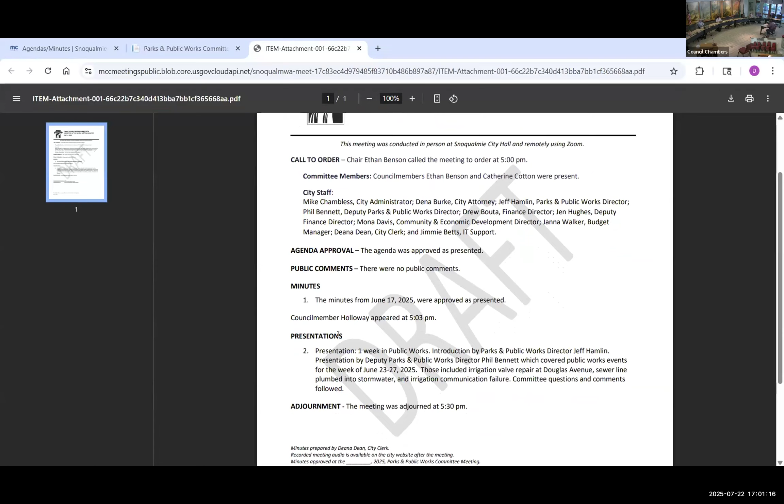First discussion topic is the reclaimed water distribution system improvements, and I believe Andrew Vining is going to tell us about that. I'm just taking a shot in the dark though.

Good afternoon. It's been a little while. It's been construction season, so we've been busy out on construction sites, but I'm here to give an update on what we've been up to.

So I'm going to start with the reclaimed water distribution system improvements, which is currently underway at the site on Ridge Street and Eagle Lake Drive. The flickers have moved out.

Yes, and I'll be providing an update on that as well as other tasks completed. So, flicker update. All right, just a quick recap. This project has come a long way since summer 2023.

That was when we completed a draft engineering report and a siting study. We evaluated 6 different sites along the BPA power road there, as well as adjacent to Eagle Lake. That engineering report is now final and approved by Ecology.

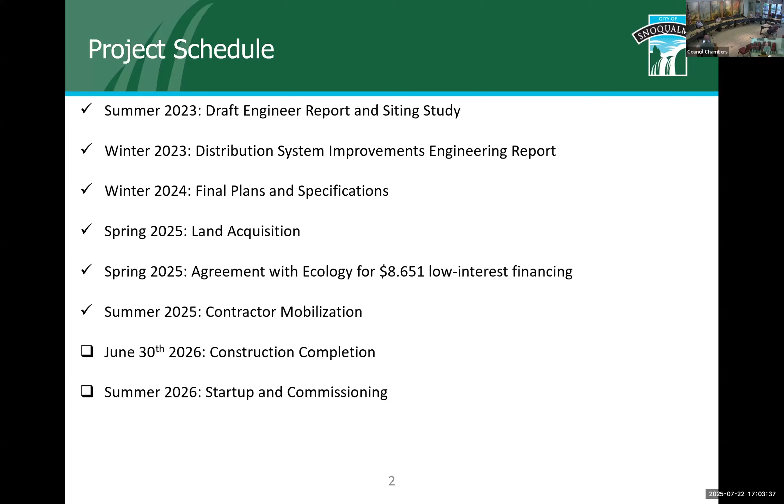This summer, early June, we had a contractor, Prospect Construction, mobilized to the site, and they've presented us with their schedule and submittals, and things are moving along. We are on track to be completing construction prior to June 30th, 2026. Following that, we'll be doing startup and commissioning of the new improvements.

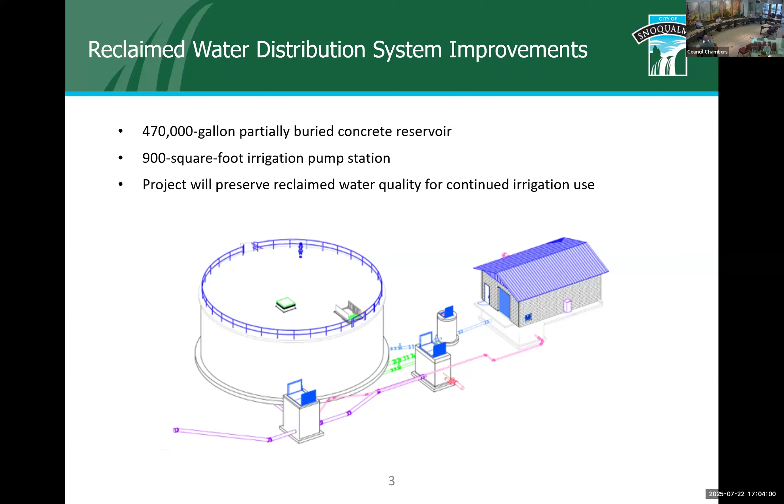So here are the improvements underway. We have a 470,000 gallon reservoir that will be storing Class A reclaimed water, a new irrigation pump station that will connect to our existing distribution system. These improvements will allow for continued use of Class A irrigation water and conservation of potable water in the city.

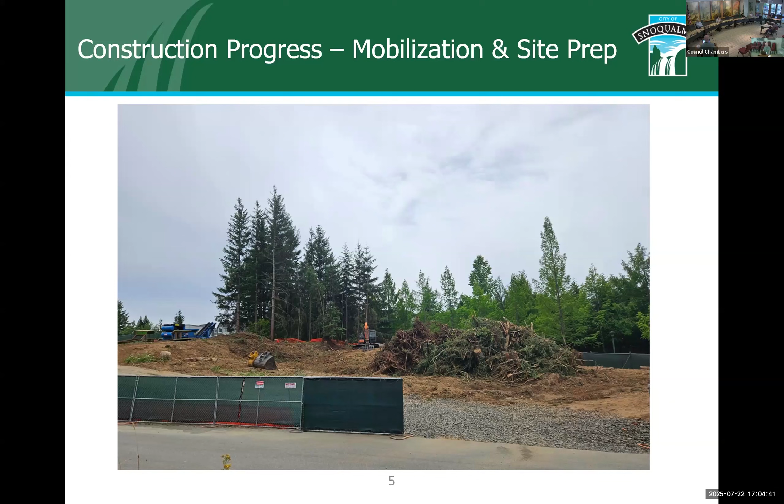There's also been some utilities adjacent to the site we need to be connecting. We have 3 utility connections along Ridge Street, as well as an extension of the existing Class A transmission main in the BPA easement, and they've begun extending that Class A main in the BPA easement.

You can kind of see it here, but working in that easement is challenging. Those power lines are pretty low, so the contractors come in to actually bulldoze out their trench and make sure they keep clearance underneath the high voltage power.

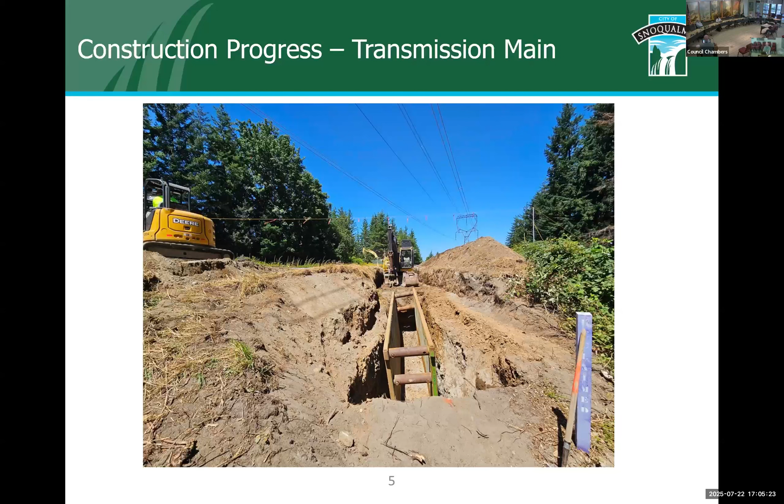Following the mobilization in early June, we did encounter some bird nests on the site. As part of the state funding, there's a number of environmental and cultural resource documents that we prepare. One of them is a migratory bird compliance plan, and as part of that, we did a bird survey in August of 2024.

We did not see any nests at the site, and we had a plan in place assuming there wouldn't be nests. We had to do an updated survey as part of that plan; we did it in May prior to mobilization, and we did identify two nests on site, a crow's nest and this northern flicker nest.

We quickly began conversations with Department of Fish and Wildlife, ecology's environmental group, and tried to determine how to move the project forward while maintaining compliance with the Migratory Bird Act.

We had in place a 150-foot buffer, which is quite large - that's pretty much the whole site. We were able to work with Fish and Wildlife to narrow that down to a 50-foot buffer, those two red circles right around the purple reservoir there. It was still a significant impact to being able to advance things on the site.

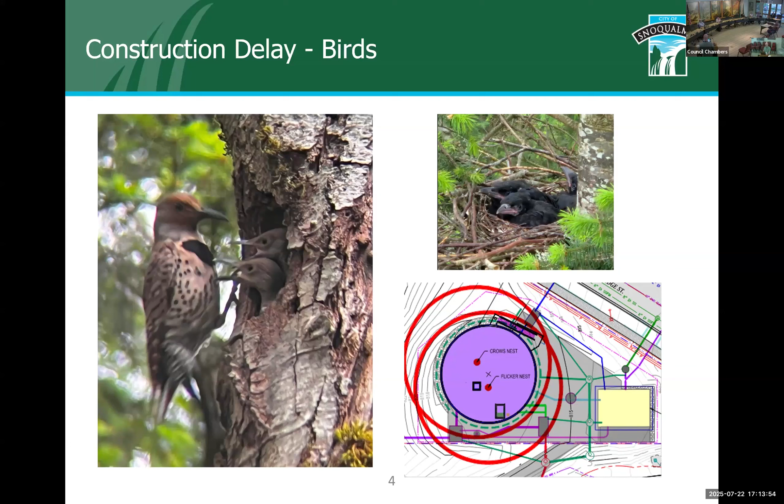There are additional environmental and cultural documents that we prepare when we have state funding, and this was one of them, so that's the reason for these additional surveys. But as of just over a week ago, all the birds have fledged, and the contractors are moving quickly out there.

So just to recap, I've gone over a lot of these items, but the highlights: we have a contractor who's mobilized, we've processed over 60 submittals, equipment is on order, and even with this recent delay, the contractor still feels they can meet that June deadline.

Some of the challenges: the site conditions, both with the BPA power lines as well as the bird nest, and then long lead electrical gear is coming up still. We've got a transformer we're trying to get our hands on, as well as some other electrical gear. But overall, it's going real well.

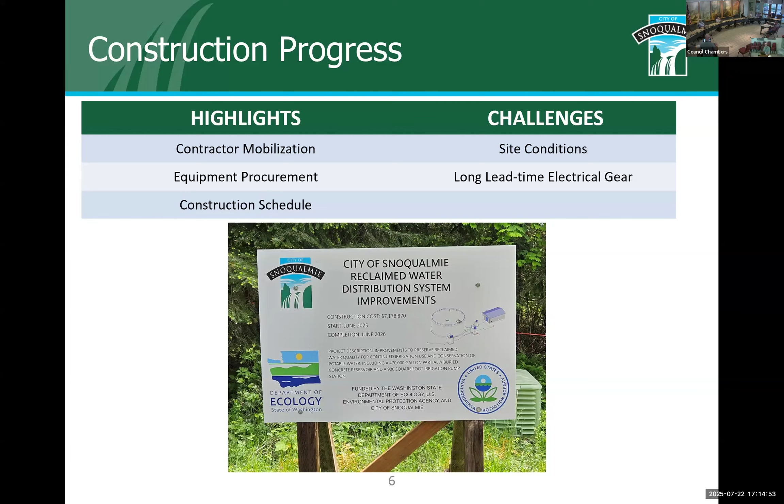We've got a sign out there. I posted it shortly after this, but we've got a QR code, and if people have questions, they can scan that QR code. It'll take them to a city website that'll show a summary of quarterly updates of what's going on with the project.

And with that, over the next couple months, they're going to pause for the Boeing Classic. No construction activities will be happening then. I do anticipate bringing a change order to council in September related to the bird impacts. And then they'll be working mainly on that reservoir construction and utility connections along Ridge Street in fall. And with that, I can take any questions.

Are golfers an endangered species? Is there some work they can do during the classic, or is it—I mean, I get it about all the noise and stuff being close to the tees. But you know, golf is not a real sport.

I think that it's a big event and it's something we established early on with the golf course, that we would be pausing work. With all the traffic and activity around there, I don't know if the contractor would want to have normal operations. But it's just like the Friday before and the weekend, so it's not a big deal—just about one week.

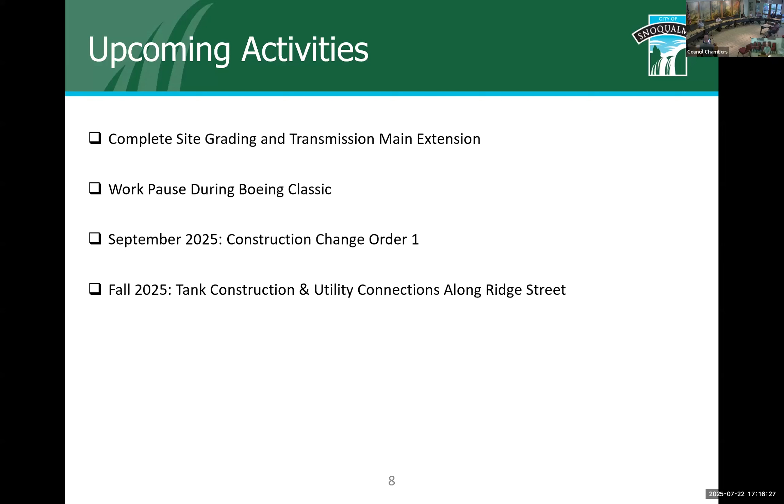All right. Anything else? Any other questions on that one?

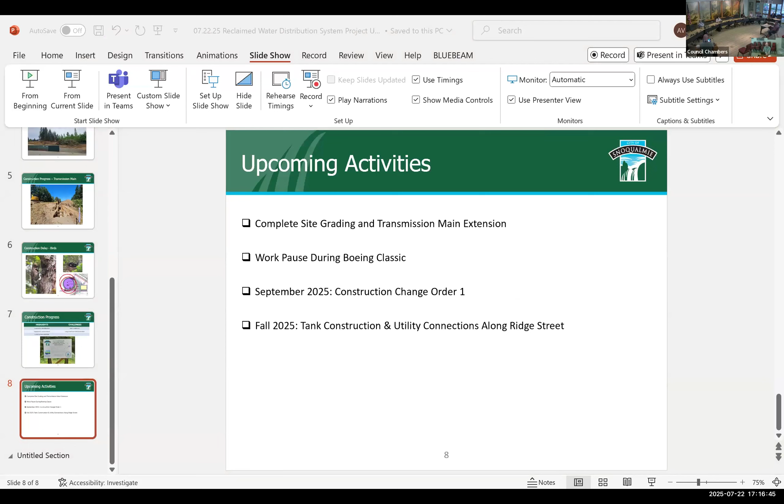Thank you. Now we're going to talk about the wastewater, or WRF Phase 3, Kimball Creek Lift Station improvements. Is it the next one? Yeah.

This is the last phase of the WRF Phase 3 improvements, and that is happening at the Kimball Creek Lift Station, which is located at the bottom of Snoqualmie Parkway. Been a lot of activity there lately. Yep, the contractor mobilized in June.

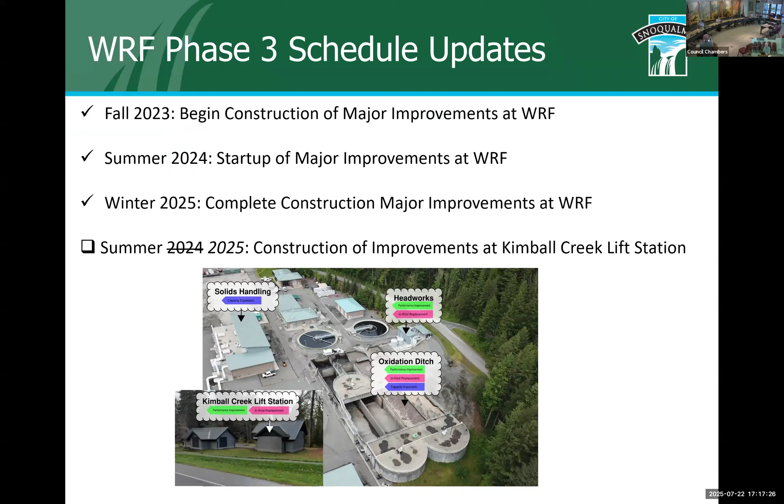The reason we lump this in with the WRF Phase 3 project is that this lift station is the biggest one in the city and it feeds the treatment plant, so it actually impacts plant operations quite a bit. We were delayed a year due to acquiring electrical gear, but we're fully mobilized now.

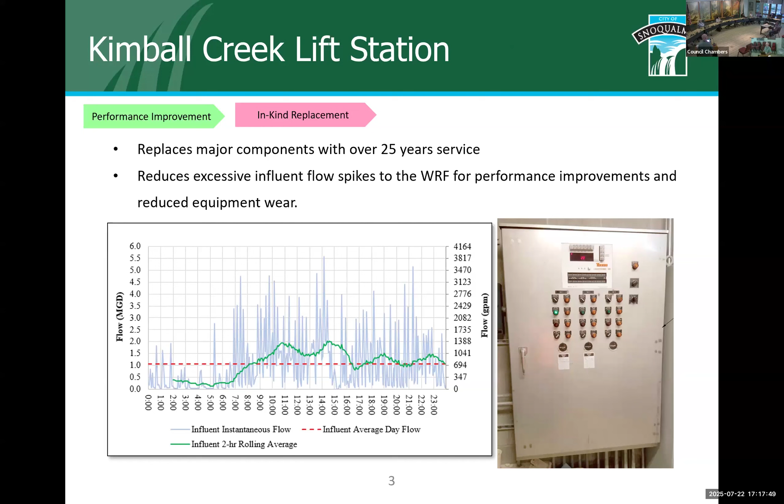These improvements really are twofold. We're going to be replacing electrical gear that is over 25 years old and reaching the end of its life, and we're also going to pace flow into the treatment plant, which will improve the general operations and performance of the WRF.

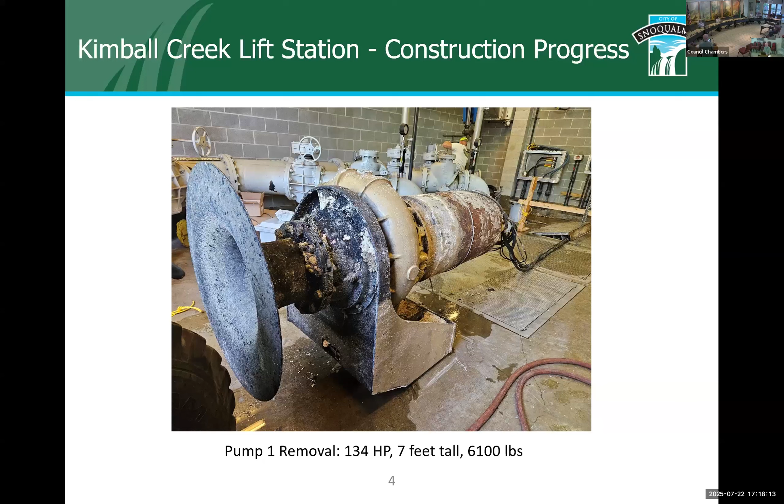This is one of the three pumps that's been on site for close to 30 years that they removed. It's 7 feet tall, 6,100 pounds. It's one of the challenges of maintaining this: when you have a pump that large, it's difficult to lift and move from the site. It's a lift station, isn't it?

The work they've been doing on site, a lot of it so far, has been demolition in the pumping well, the wet well. On the left was a few weeks ago, and on the right is just this week, removing the old concrete and putting in a new pre-rotation basin there on the right, which will house the new pump.

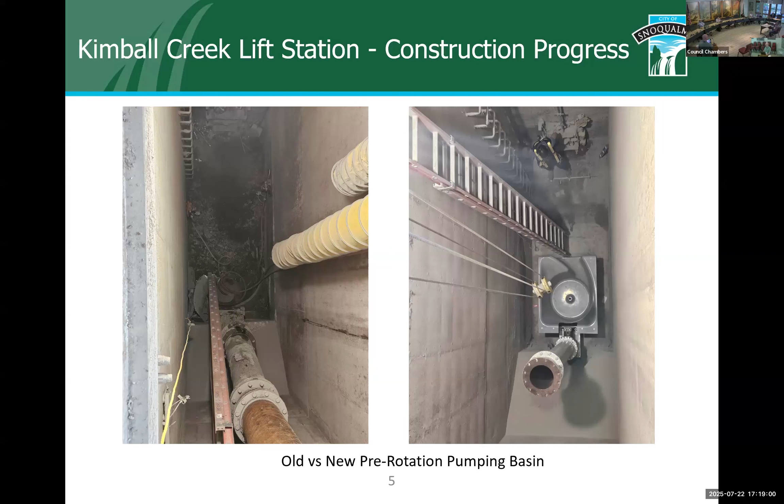One of the challenges we came across here that was not anticipated - we were expecting grout in the bottom of that wet well, and we found reinforced concrete, which really slowed down the demolition activity and added a couple weeks associated with that. But that demolition work is now complete.

Overall for this project, it's been going well now that we've got a contractor on site and the materials on hand. The electrical gear was inspected - that's the new panel there on the left.

Starting next week, we'll be taking this lift station completely offline, which is a big deal - there's no power to the site, no communications. So the contractor has constructed a diesel bypass pumping system, which is on the bottom right, and that'll be providing sewer service while we replace the electrical gear.

We had some challenges getting the right equipment on site. I think we have a really good plan in the contract, but it took two iterations to get the right pumps out there. As of today, it was pumping correctly, and we're going to be testing that out this week before we shut down power next week. So that's a nice milestone for us.

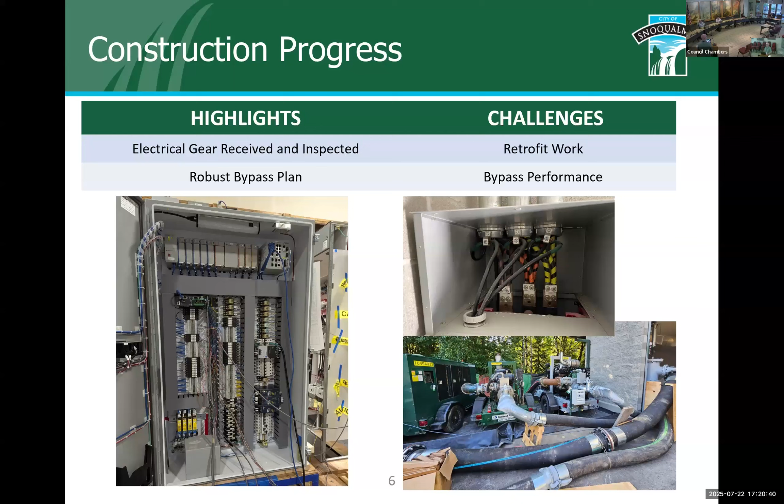Some of the other challenges with retrofit work - we've encountered some unknowns. That reinforced concrete with rebar is one. The main electrical leads were modified and didn't quite extend to the new control panels, so we're going to have to replace those with proper lengths so that meets current code. We should be wrapping up construction in September on this one. I do anticipate a change order associated with those site conditions with the reinforced concrete and rebar, as well as some mechanical changes with the new pumps.

Who was the engineer on this? This was RH2 Engineering, this is their third pump station. Who was the original engineer and installation? This came in as part of Ridge 2, didn't it? Or Ridge 1 - yeah, this would have been early on. KCM did the as-built.

And the rebar was not noted in the as-built? It was buried in the as-built - we were looking at mechanical sheets. If you go to the structural sheet, there's a general reference to reinforcement on the cover sheet, so it was difficult to catch.

But whose responsibility was it to catch that? It wasn't the city's responsibility - that's why we have these engineering firms that we do. We do rely on our consultants to catch these things. It's a level of detail that they missed in this case.

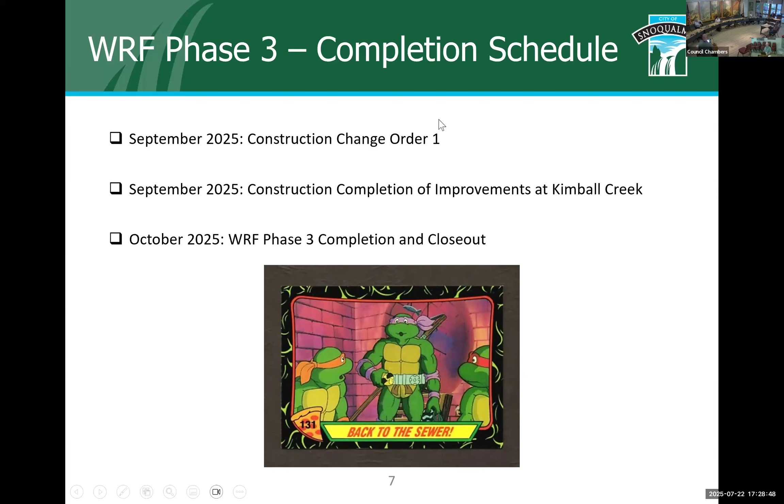This is a smaller project than the reservoir project, but giving that bypass system proper attention is important to make sure we stay in compliance with our permits. Yeah, and we're giving it plenty of attention. All right, anything else, anybody? All right, thank you. Yes, thank you.

And according to my agenda, that takes us to director reports.

Good afternoon. Let's talk about staffing and projects. For staffing, we are currently recruiting 2 new employees. One is our admin—we were essentially waiting for the utility rate study to be completed before we hired that admin. That's now completed, so we're moving forward with the recruiting process. We're going to recruit internally first, and then open it up to outside if we need to.

We're also currently recruiting for a wastewater operator, and that's going very well—we interviewed about 10 people. It's kind of crazy, which is amazing considering a couple of years ago we couldn't get anybody to apply for one of these jobs. So it's nice to actually have some options.

We're taking a little bit different approach this time. We opened it all the way up—so level 1s, 2s, and 3s, we're advertising for all of them to see what we can get. We're going to try to get the best person we can find.